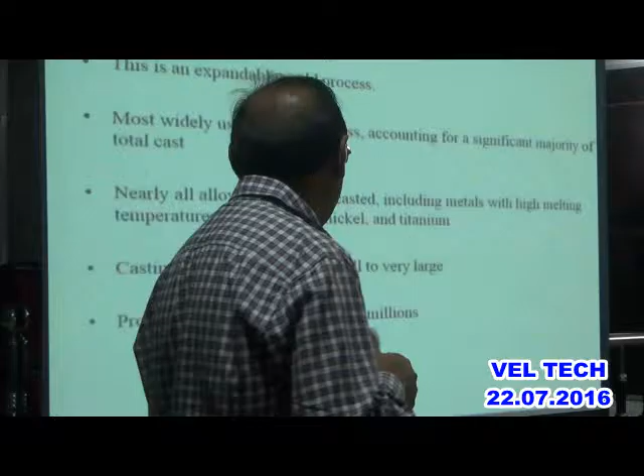Riser: an additional void in the mold that provides additional material to compensate for shrinkage, as we saw. Then a gating system: a network of channels that deliver the molten metal to the mold. There can be 3-4 molds or products, so the gating system would be used. The pouring cup, on the top portion of the gating system, controls the delivery of the metal.

Sprue: the vertical portion of the gating system. Runner: the horizontal portion of the gating system. Gates are control entrances, meaning the combination of runner, sprue, and cup are all gates. Parting line separates the cope and the drag - so this is a parting line.

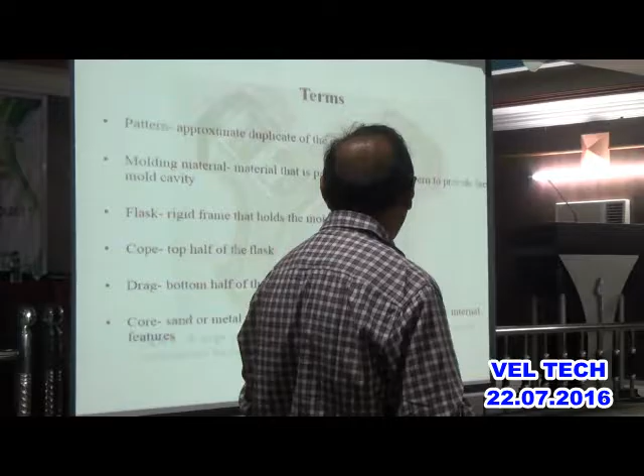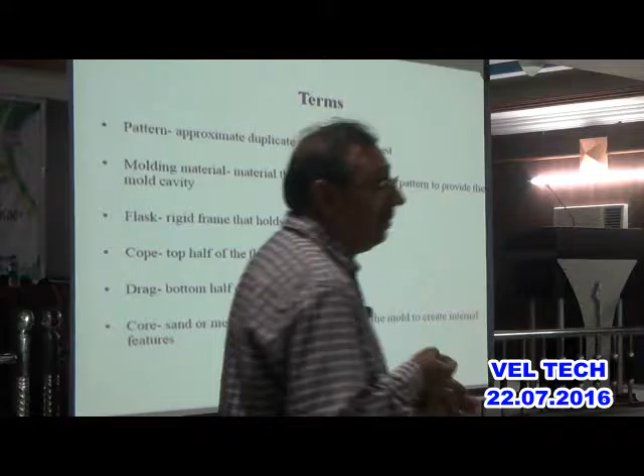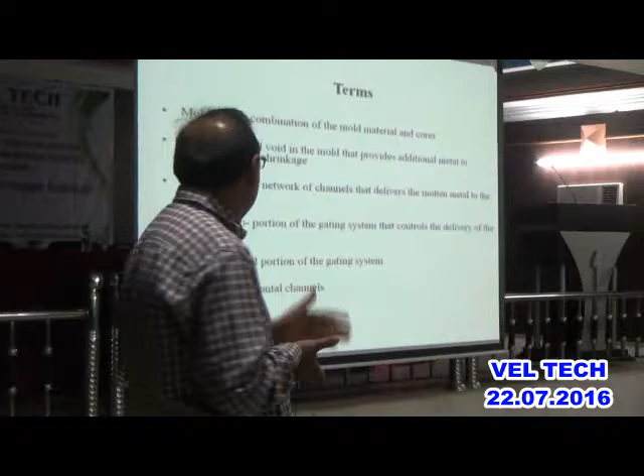The draft is the angle or taper of a pattern that allows easy removal of the casting from the mold. So if you see this, there is a slight angle this way. If I want to exaggerate, it is like this. So when the pattern has to be removed, if you keep this straight, there is a possibility that this straight line will get damaged. So we keep an angle so that it is very easy for the pattern to come out.

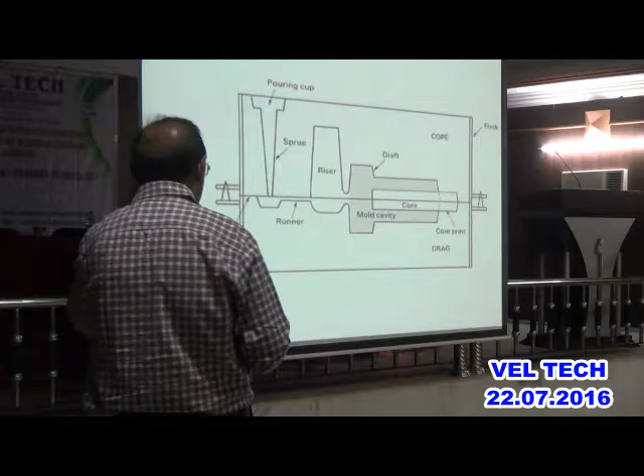Later on, anyhow, we are going to machine this part. So that's called the draft - the angle or taper of a pattern that allows the removal of casting from the mold very easily.

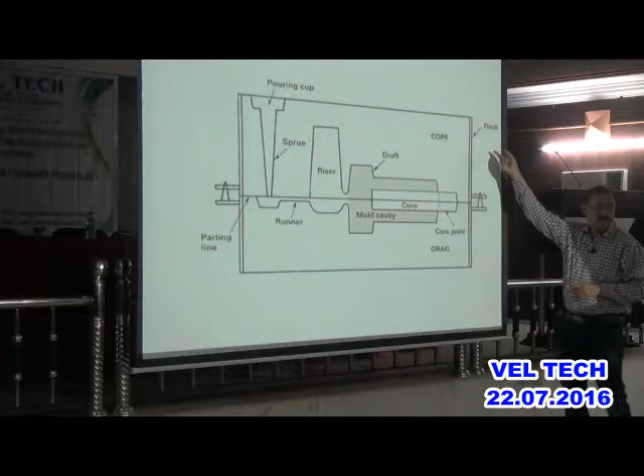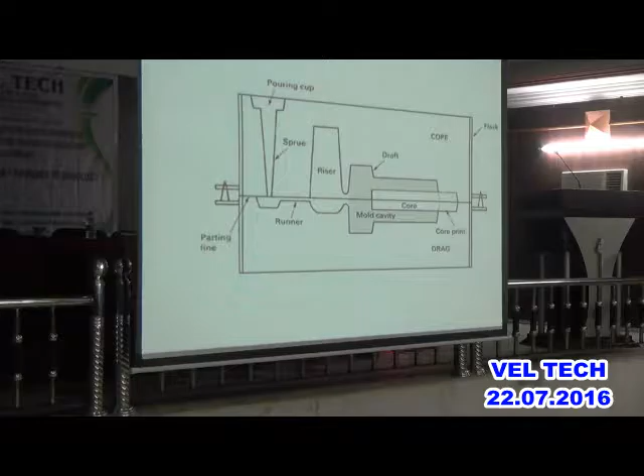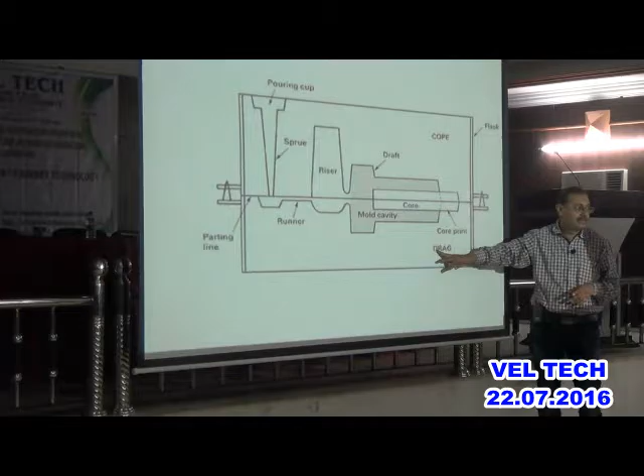And finally the casting. The casting has two meanings. The casting is a process - the foundry process is also called casting - and the final casted piece is also called casting. So it describes both the process and the product, when molten metal is poured and solidified. Is that clear? The entire process is called casting, and once the product is ready, that piece is also called casting.

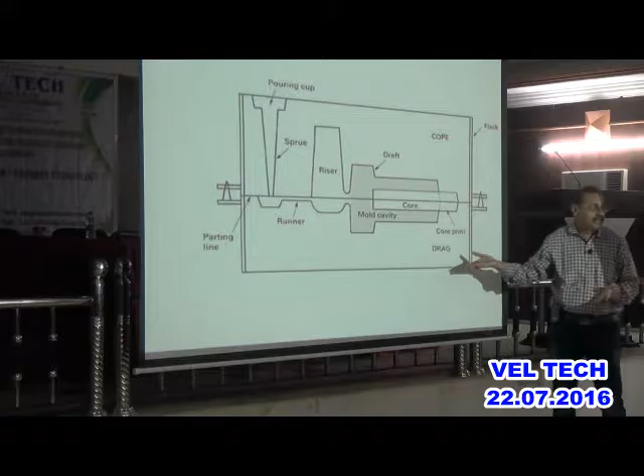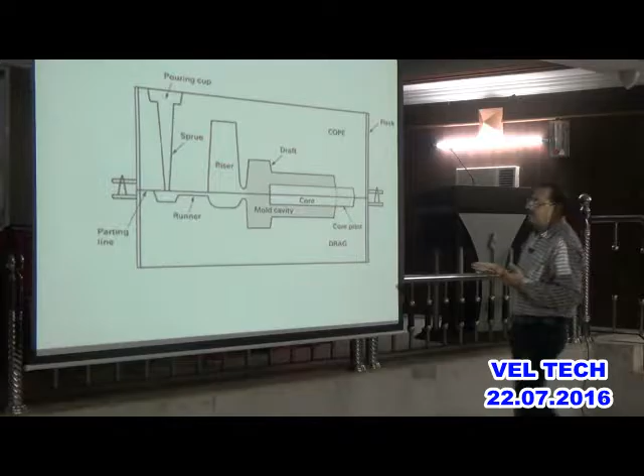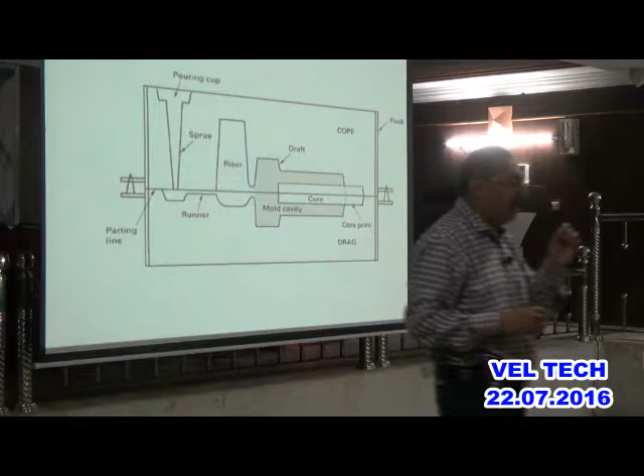Now let's quickly run through whatever I explained. The first part is making the mold - use a pattern and make a mold, that means create a cavity. The design must take care of the desired shape, size, and shrinkage. You can decide whether to use a temporary core or a permanent core. A temporary core is made out of resin and sand, and a permanent core could be like a steel core, but generally we use a sand core.

The next is the melting process. So we will see today how aluminum alloy is melted. You require a furnace to melt this. You also require some air, so a blower which gives air - and the air has around 21% oxygen. That oxygen helps the coal in the furnace burn, and that gives heat to the aluminum alloy, which then melts.

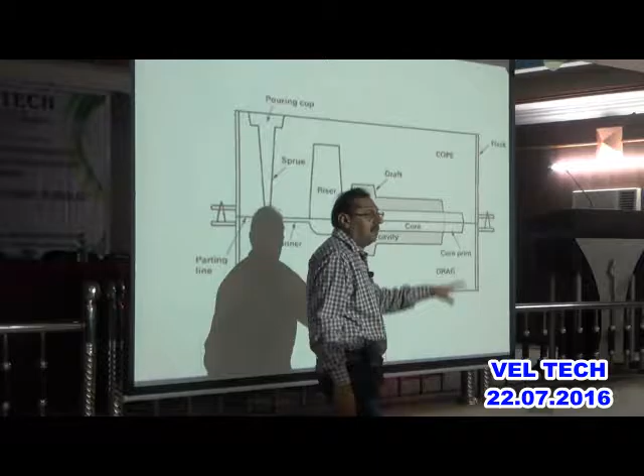Then that aluminum alloy, melted in a furnace, needs to be removed and poured into the sprues or the cup. For pouring you require something like a ladle, or the furnace must be tiltable. Once I tilt the furnace, I can collect it in a ladle, and then from the ladle I can pour it into the mold. So that's the pouring technique which we will see today.

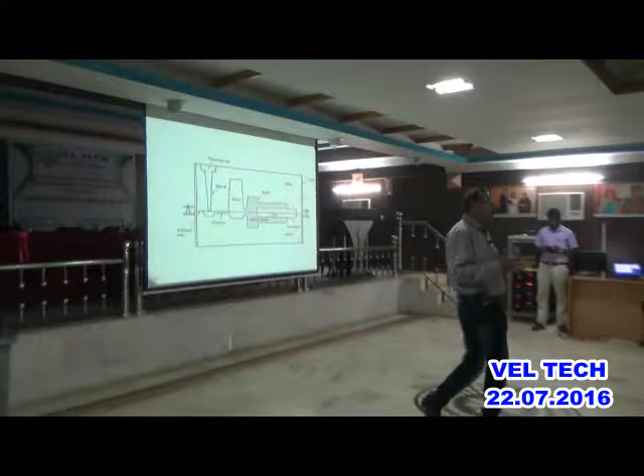Then the solidification process - once the pouring is done, the shrinkage is taken care of, and after some time this molten metal solidifies and we get the casting ready.

Then the mold removal - you open the cope and drag and remove the casting, and finally we clean, finish and inspect. So we cut those runners and risers, do a fettling process, if required a grinding process, and if required we wash it, then send it for machining and inspection. That's the last process of the foundry technique.

So now let's go back. We talked about sand - how do we make the cavity, how do we use a core, and how do we use a pattern?

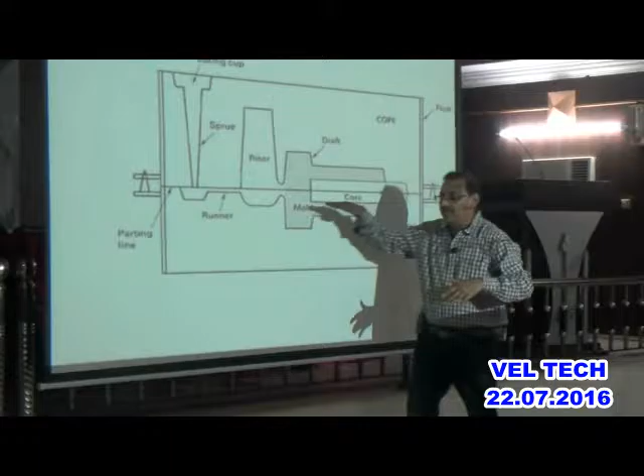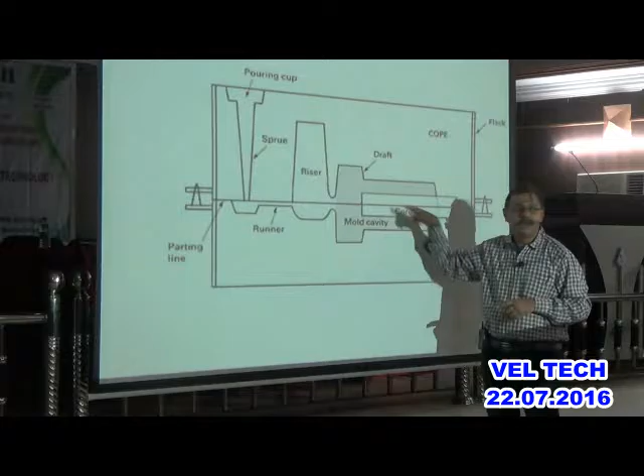If I want to show it in a block diagram, I take sand and prepare that sand to make the mold using a pattern. So I need to make a pattern, I need to make a core, and I need to prepare sand. A core is only needed if you require something hollow, otherwise you don't use a core. Make the core separately, make the pattern separately, and once the pattern and core are ready, prepare the sand with the cope and drag, and make the mold with the help of all three. Once the mold is ready, melt the material, pour it, solidify it, remove it from the sand mold, then clean it and send it for inspection.

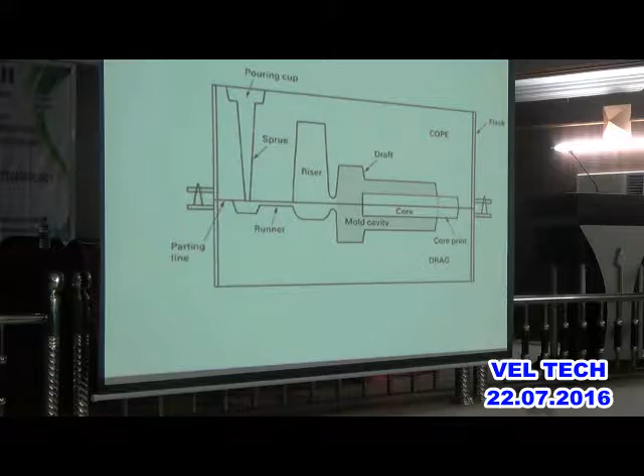And then finally you get the casted piece, and then you can ship this casted piece in the market.

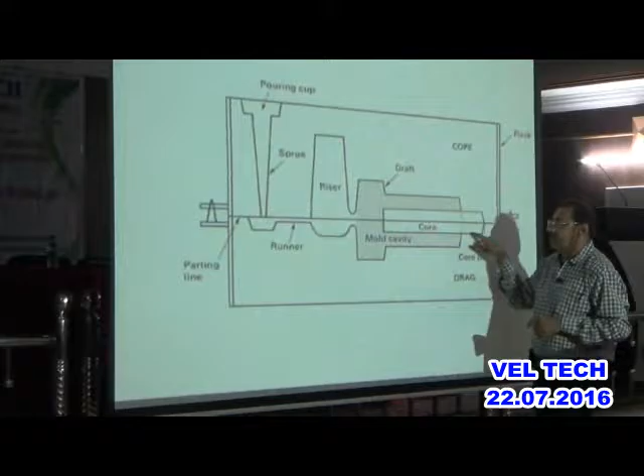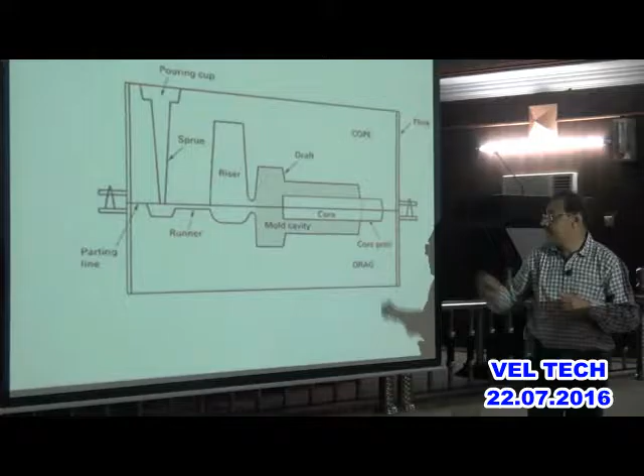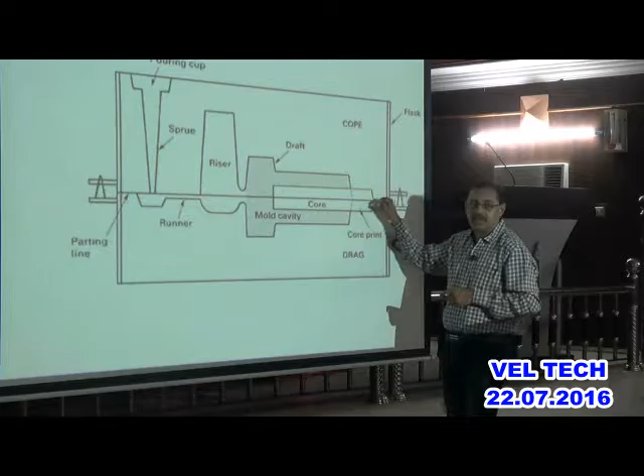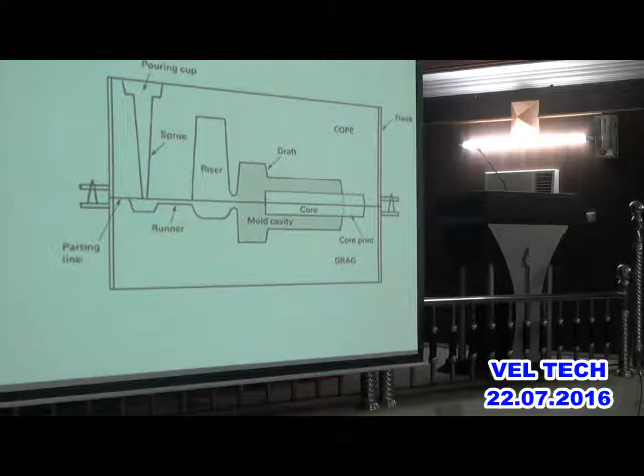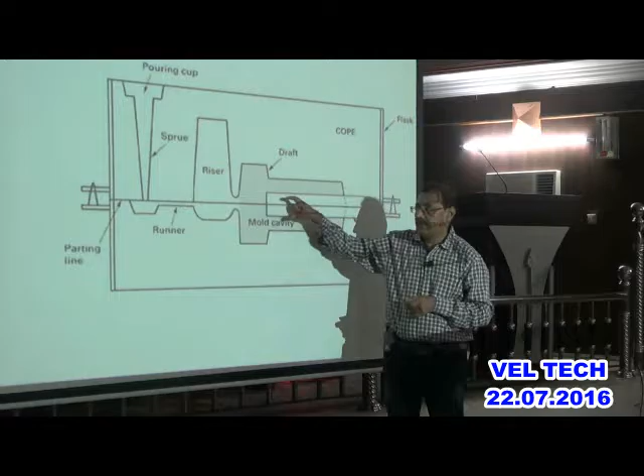Then we talked about the core. The core is a full-scale model of the interior surface of the part. So whatever hollow portion you want, that which is hollow will be solid here, so that the molten metal will not get poured into that area.

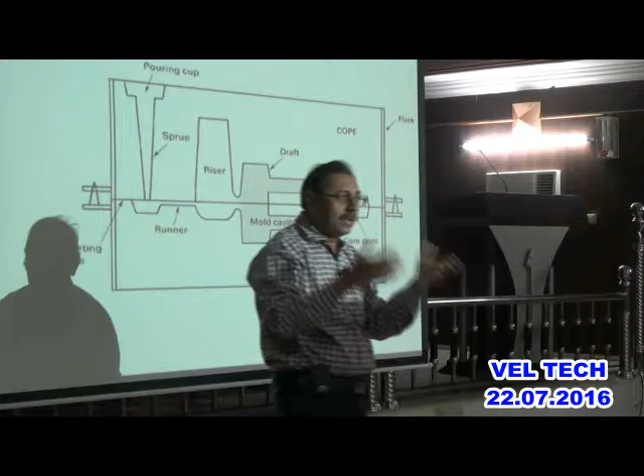Now, can you imagine that you have a core? How are you going to hold that? So in this picture you saw that you make a core slightly bigger so that it can be held. But you will see that this is cantilever. The core is this way, it may try to sag, it may try to fall down. Then how do you keep this distance and this distance the same? How do you do that?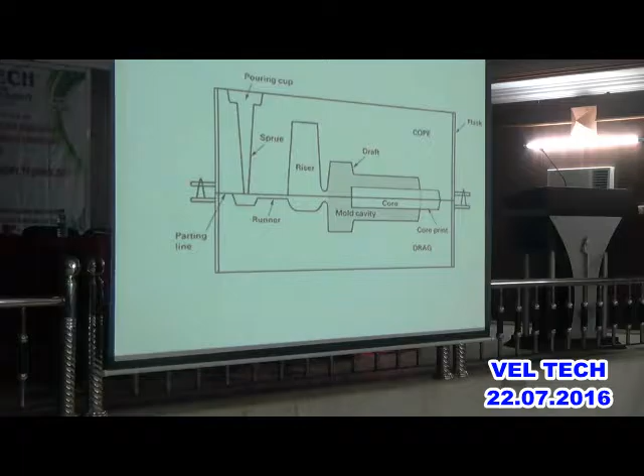Yeah, anything, but suppose you have support below, you need to put some support here so that it can later become a part of this piece. So that material is called a chaplet.

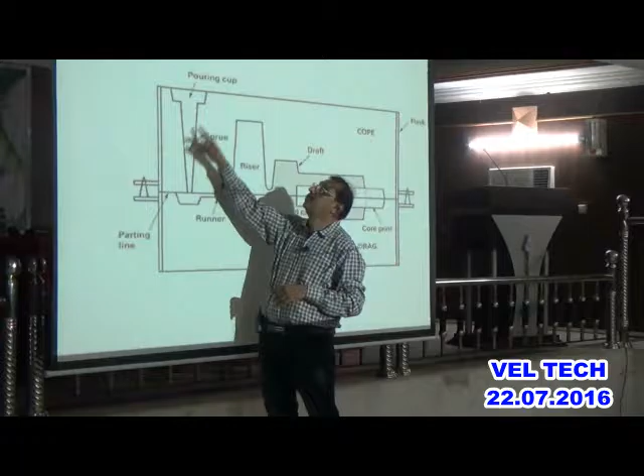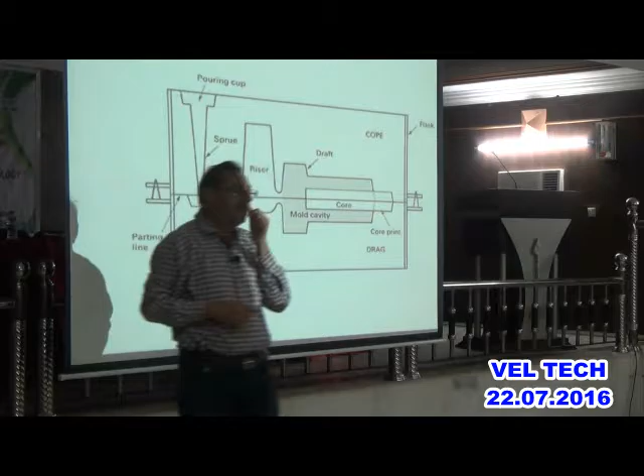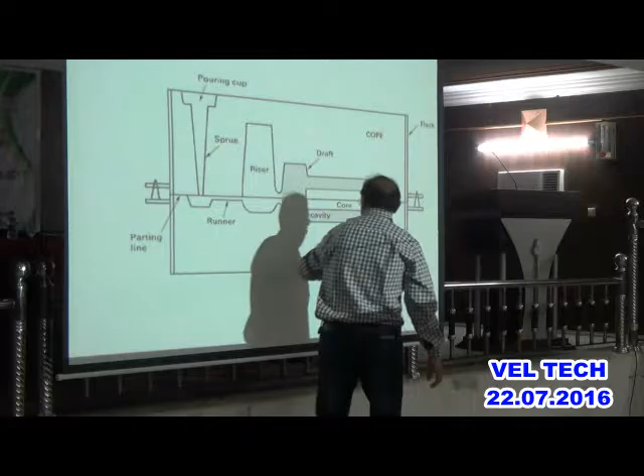And this is how the entire runner, riser, core, drag, sprue, cup - the entire thing looks like. And you can see this is the sand and this is the core. And finally what you get out of that is this product, a hollow piece with two ODs and one ID.

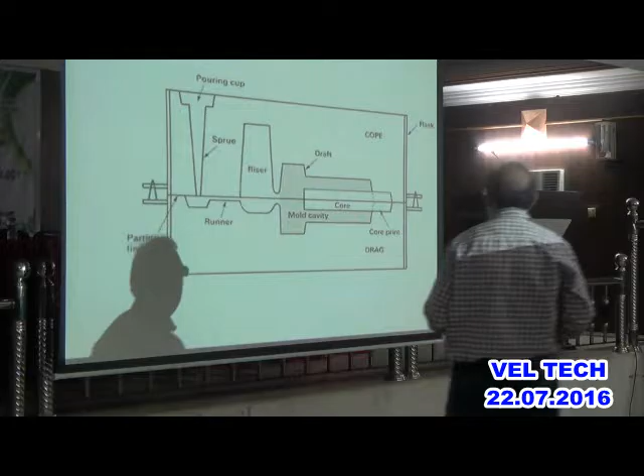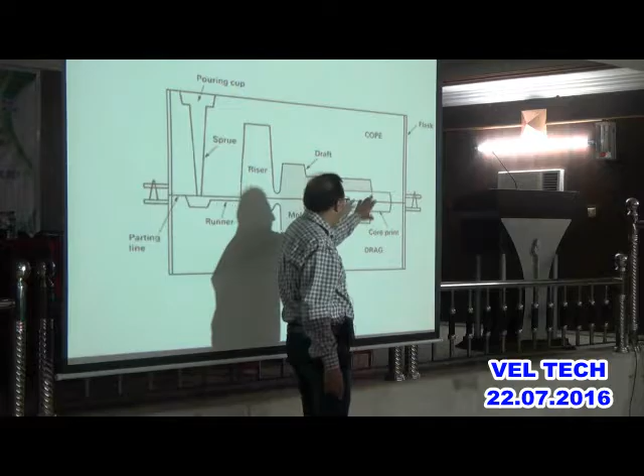So from a mold, what you expect is strength and permeability, because there may be some hot gases released when you pour the molten metal. These hot gases must not remain in the material, they must get into the sand. So the sand will absorb all this heat and hence it has to be slightly porous, which is known as permeability. Then thermal stability - at the same time the sand must not disintegrate.

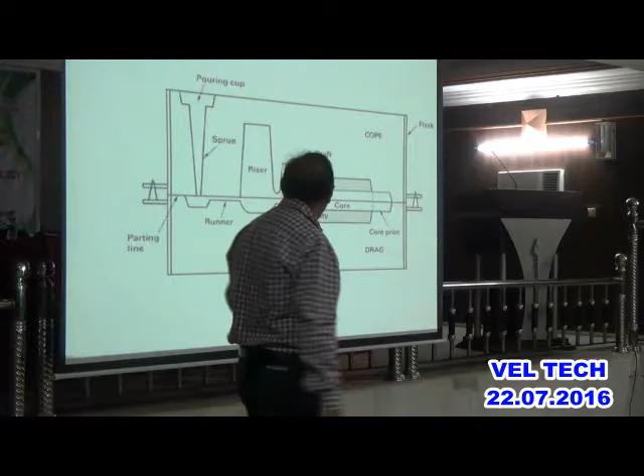The molten metal must not enter the sand, it must not crack. The collapsibility is the ability to give way and allow casting to shrink without cracking the casting. And reusability - can we reuse this sand? Yes, we can reuse this sand.

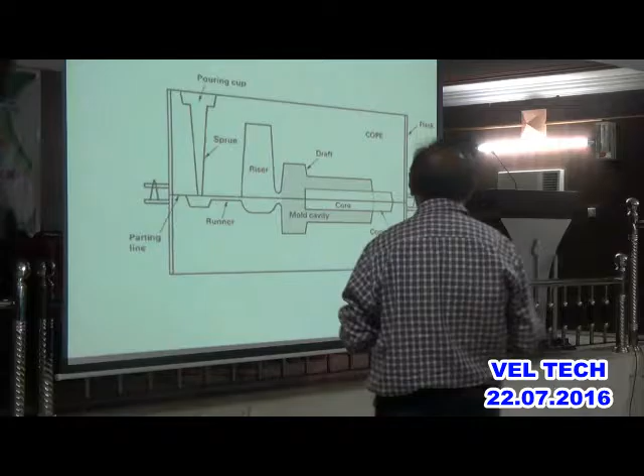So the most important sand for foundry purposes is called silica sand, made out of SiO2, and it has good refractory properties and small grain size, which you can vary. You can also use a binder. As I told you, if the sand is 90% and water is 3%, then clay would be around 7% to bind the sand. If you don't want to use clay, then you can use organic resins and organic binders.

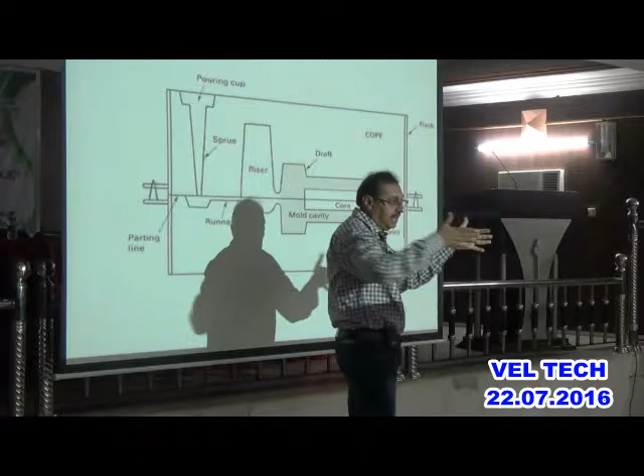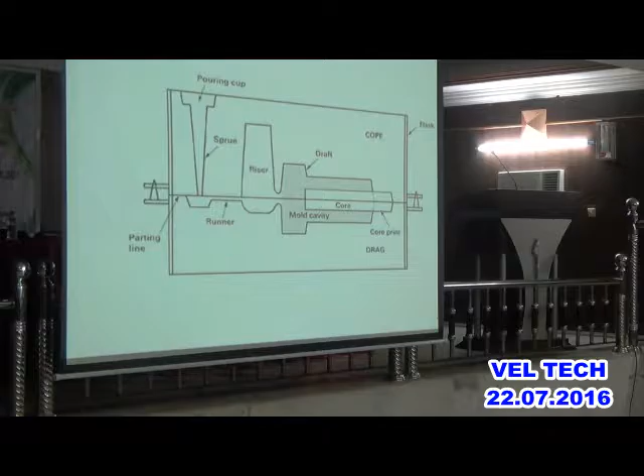So there are different types of sand. One is called green sand mold, one is called dry sand mold, and third is skin dried mold. In a green sand mold, you take a fresh piece of sand mold, and in a dry sand mold you use organic binder instead of clay, and then it is baked. So it is heated to a certain temperature so that it becomes stronger - totally dry, the water gets evaporated and it becomes stronger.

Whereas today we are going to use green sand. After lunch for our practical, we are going to take sand, add clay, add water, and then use our hand to put it in the cope and drag, and hence it's a green sand. We are not going to dry the sand or bake the sand. In the third process, you make a green sand, and only the skin portion is dry, the entire thing is not dry. That's how you can save some money in that.

So there are advantages and disadvantages of all this process. Basically, if you want a piece of a particular diameter, you can directly get that diameter, you don't have to do any machining. But this could be very expensive.

Sand casting is more expensive if you want to do mass production. If you want to make 1,000 pieces, you use die casting instead of sand casting. If you want to make 1 or 2 pieces, you use investment casting, that is using wax. If you want to make 100 pieces, you can use sand casting. If you want to make 1,000 pieces, you have to use die casting.

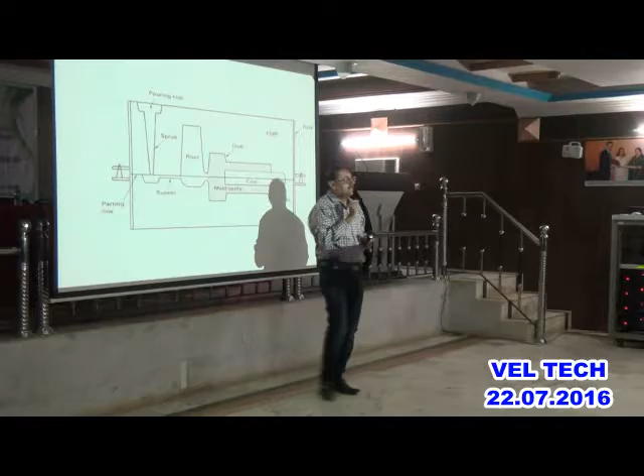Die casting can be used for mass production because it can be done quickly and there is nothing gets dirty, there's no sand, no pattern around, so everything becomes neat, clean and faster. But then the dies are very costly, the major cost is the die. So only if it's mass production do you use a die, otherwise you use a pattern.

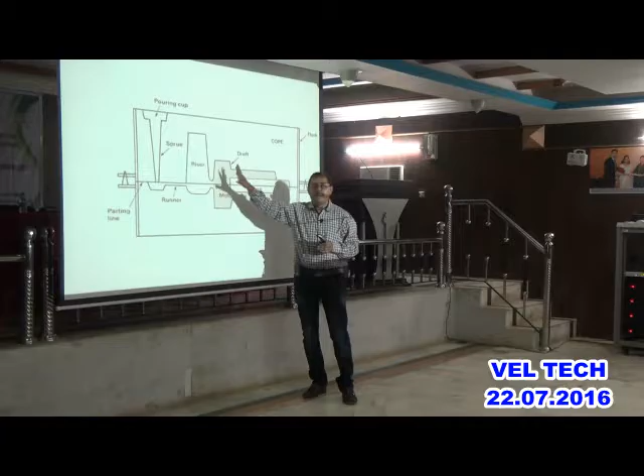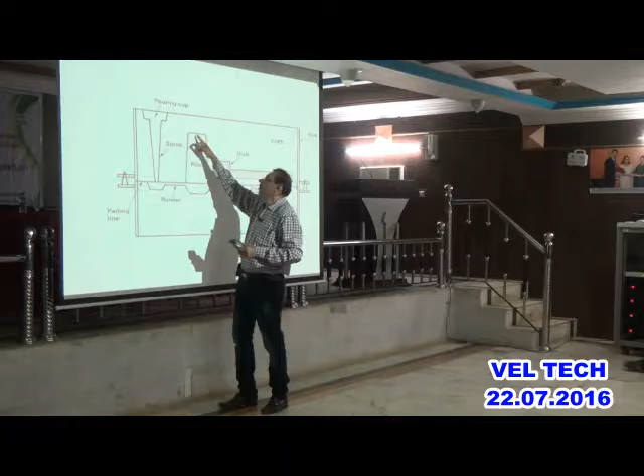So the steel becomes the mold for die casting. This is very good for mass production, but the only disadvantage is that it can be used for metal which melts faster. So here if you want to melt it, you can use aluminum alloy. We are going to use aluminum alloy today, but aluminum alloy can be sand casted or die casted also.

You can use zinc, tin and lead for hot chamber die casting, and for cold chamber die casting you can use aluminum alloy. So generally die casting is limited to metals with low melting points.

The third casting is called investment casting, and that's all we are going to study. Investment casting is when you want a very good surface finish, then instead of a wooden pattern you use wax. The advantage is that when you pour the molten metal, you don't remove this wax pattern, you keep it there, and then when you pour the molten metal, the wax will move ahead and come out first.

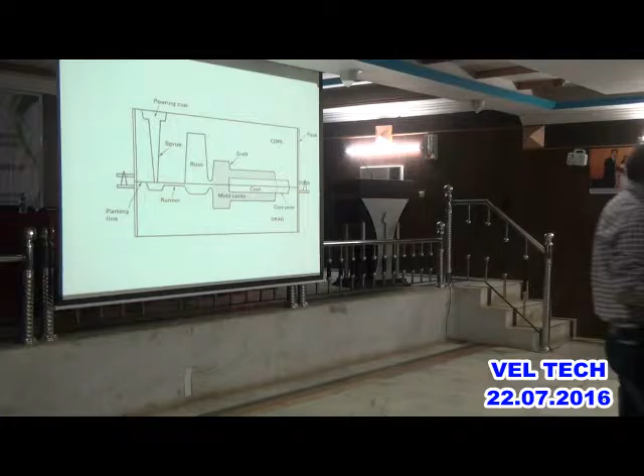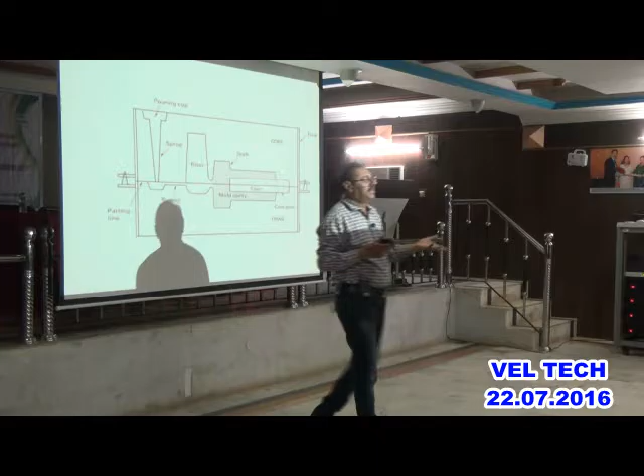And that wax can be reused again and again. Only thing is you need some energy to make that wax pattern. And a wooden pattern can be used again and again, the metal die can be used again and again, but the wax pattern can be used only once, and then you have to recreate the wax pattern. So it is called investment casting because you are reusing the wax.

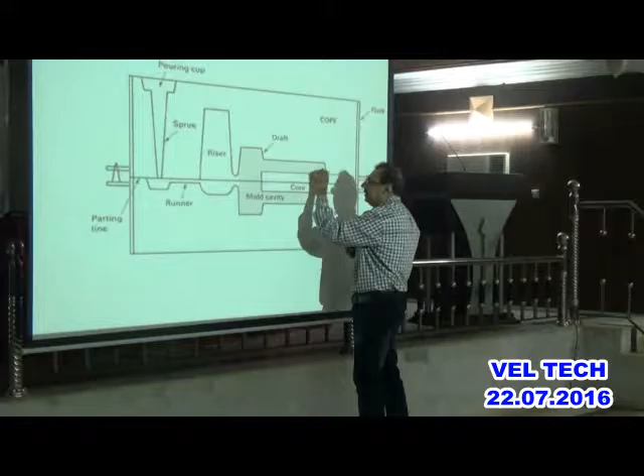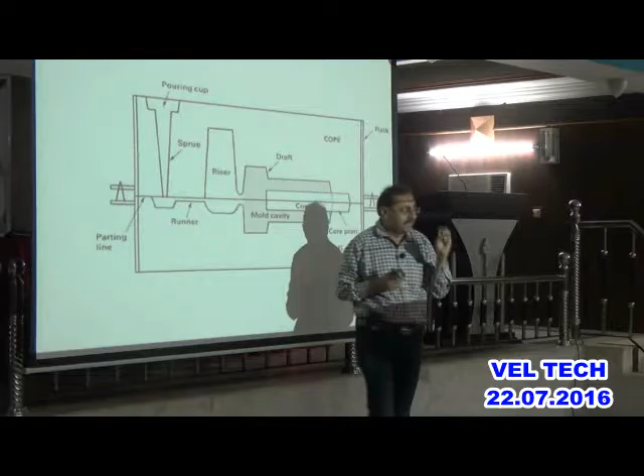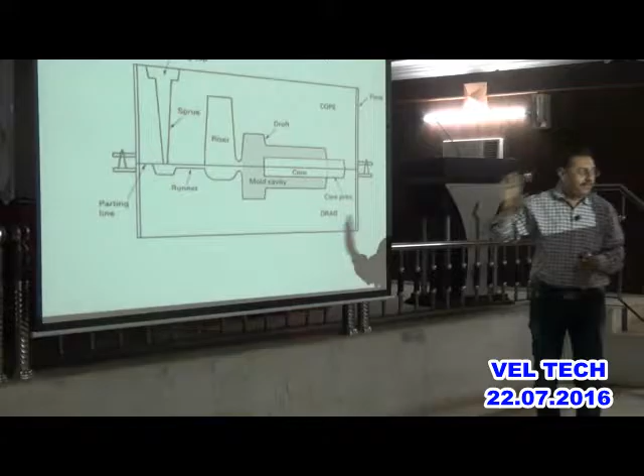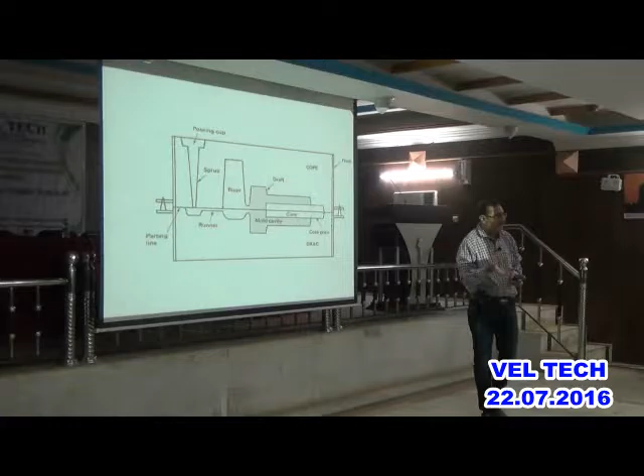So you use wax, and by slightly heating it, the wax can be removed, and whatever void is created, in that you put the molten metal. The advantage with this is you get a very good surface, because when you use wax, you get a very good surface finish, and when you pour the metal into this, your surface finish is extraordinary.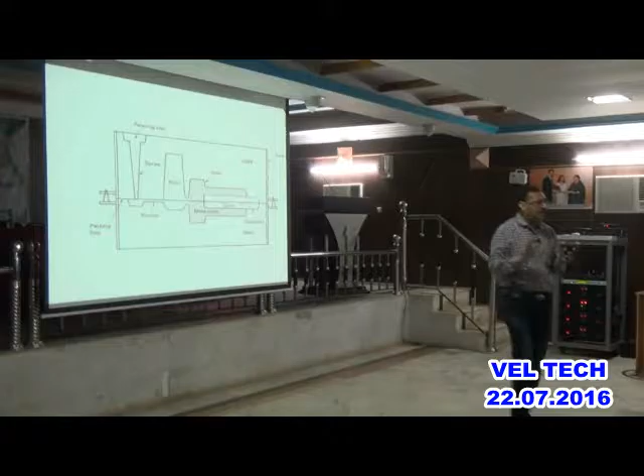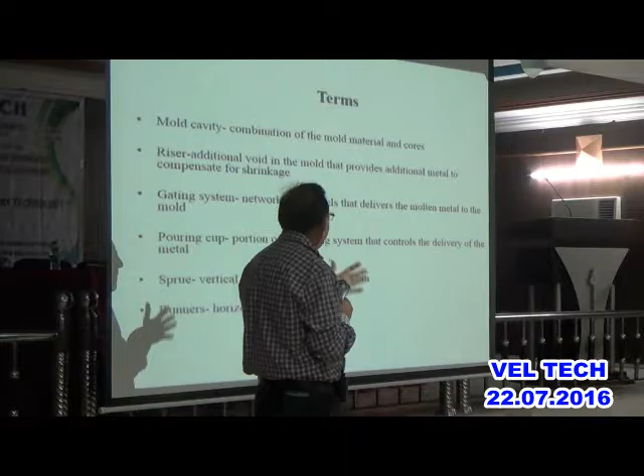So today we saw sand casting, investment casting, and die casting. Investment casting can be used for high temperature alloy, which gives a very good surface finish. Die casting can give still better surface finish, but it is used for low temperature applications, whereas sand casting is used for high temperature applications. If you want cast iron, you use sand casting, but the surface finish is not good. So each of these systems has advantages and disadvantages, and based on that we take a decision based on a particular product, its manufacturing method, and the materials.

So after you finish the solidification, you remove this and need to do trimming. That means you cut off all those parts, remove the core, surface clean it, inspection, repair, heat treat, and so on.

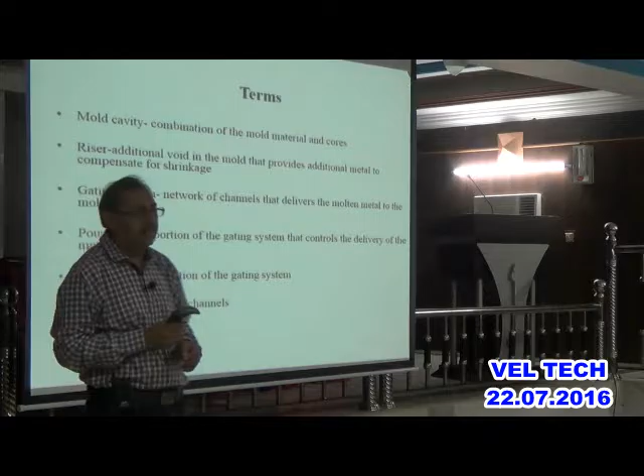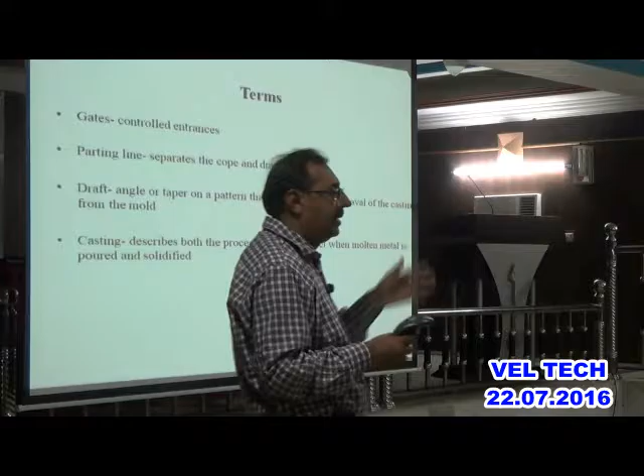What is the time now? 1:45. So we have 15 minutes left, right? No? So shall we stop? But then we are not meeting again.

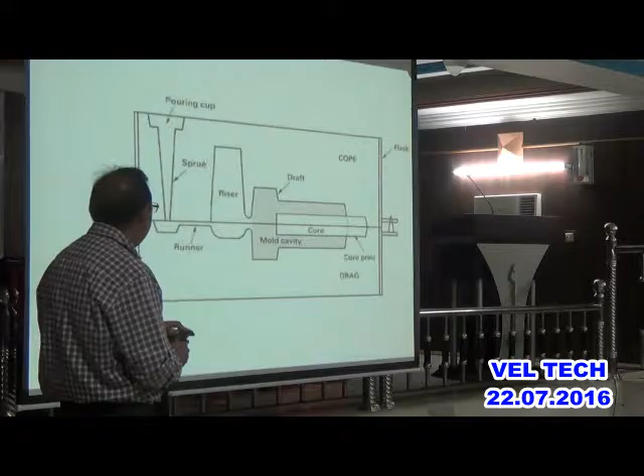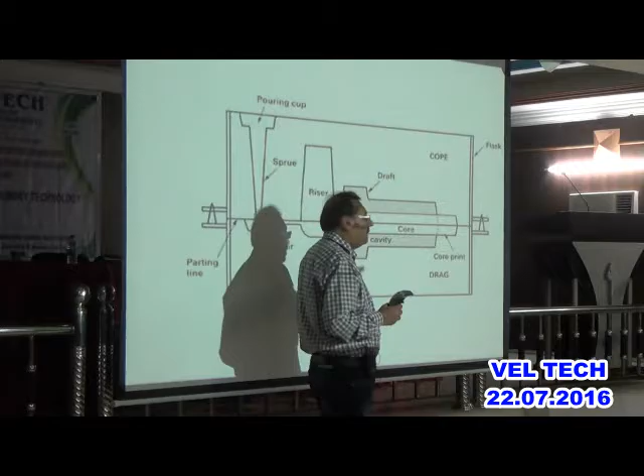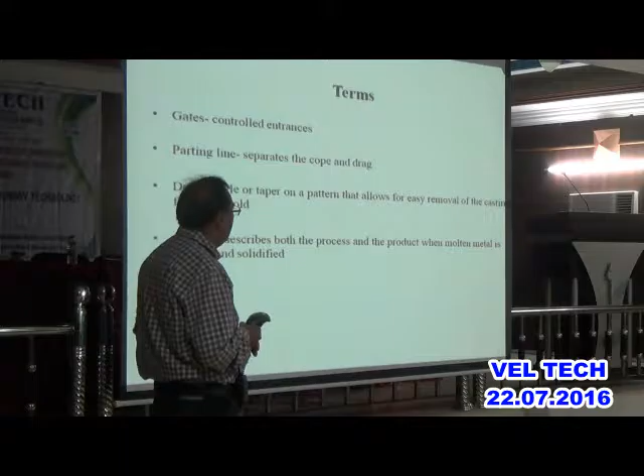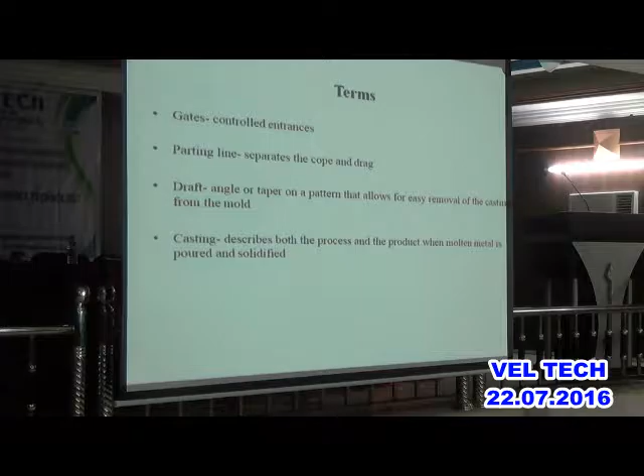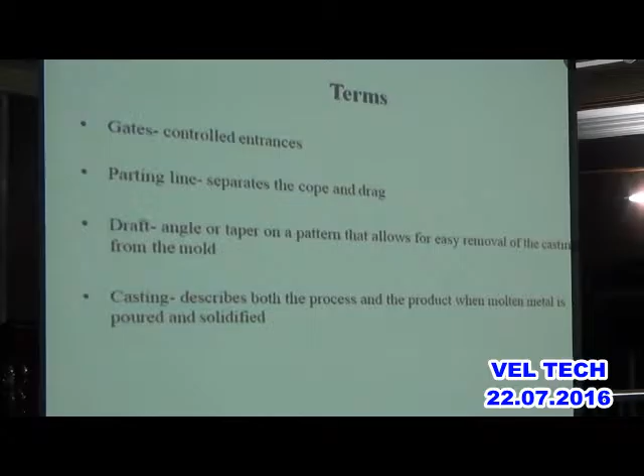What type of design considerations, what type of tolerances, what type of draft you can have, all those are discussed during the design stage. For example, the draft may be 1 degree - when I said that earlier, I exaggerated. So the product is slightly like this. The draft will be 1 degree for sand casting and 2 or 3 degrees for permanent mold process. You can see the draft angle here. This is straight, no draft angle. This one has a 1 or 2 degree draft angle. Then it is very easy to lift it; here when you try to lift it, the surface will get spoiled. So this is how the draft is given.